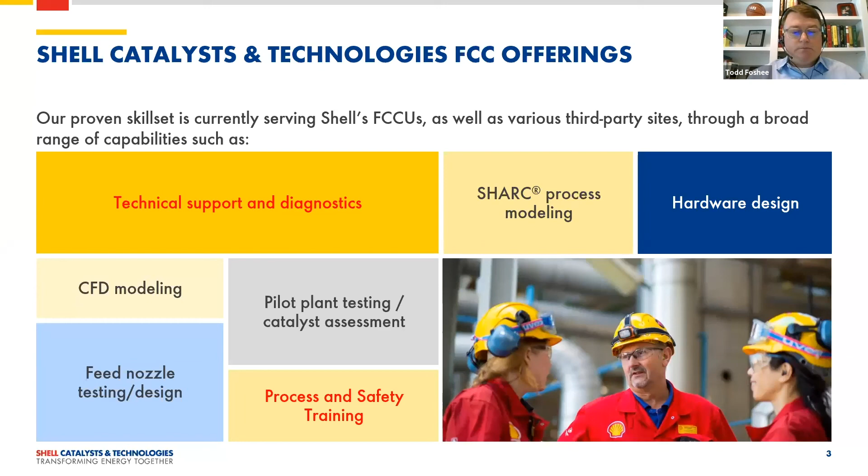So what is SHARC? Well, let's start with the acronym itself. SHARC stands for Shell Advanced and Rigorous Cat Cracking Model. Okay, so it's a model developed by Shell based on decades of R&D research and includes over 50,000 different test runs from pilot plants and FCC unit operations. And all of that was done to generate a set of proprietary kinetic correlations as well as feed characterization correlations.

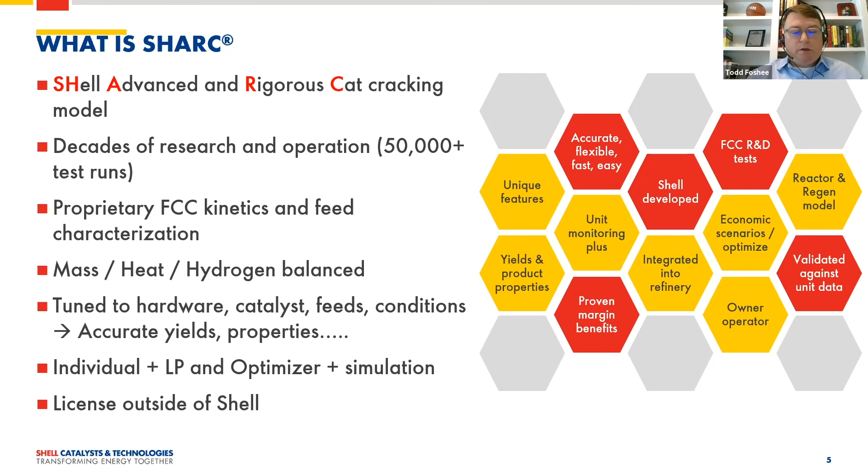Beyond doing unit monitoring, SHARC can be utilized to generate base plus delta vectors to be used in the LP model by the economics and scheduling team. And it also can be used to run the online optimizer for the FCC. Of course, I've already mentioned, this is used within Shell, but it's also available for license outside of Shell.

The history of SHARC. So it dates back all the way to the beginnings of FCC in the 1940s and 50s, when Shell started to initially look into FCC kinetics and began an R&D program. In the 1960s, Shell was able to develop the first FCC kinetic model. It's the precursor to SHARC. It was based mainly on gas oil feeds and silica alumina catalyst. It was very accurate, but it was very slow and cumbersome due to the complexity of the model.

In the 1970s, Shell was able to expand the FCC kinetic model to cover resid feeds. It also was able to generate better kinetics through kinetic selectivities or selectivity ratios. And then it also implemented a feed characterization property, which was able to greatly simplify the ability to characterize the feed. It also produced a faster and easier to run model.

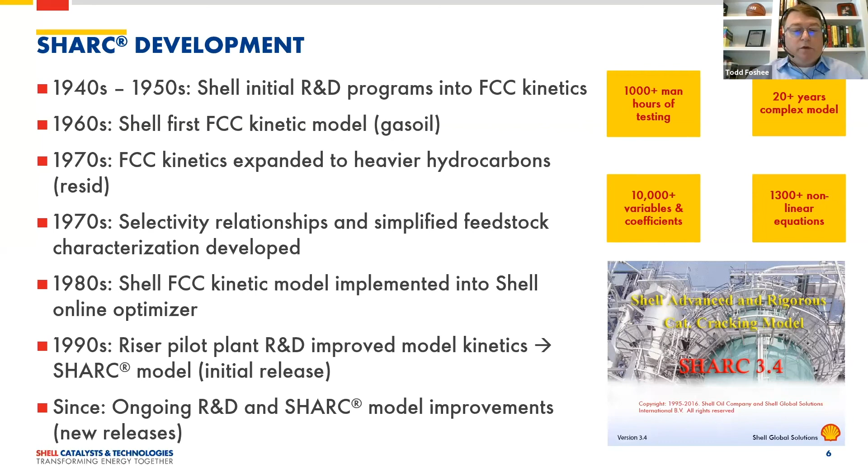In the 1980s, the model was further improved and made faster, such that it was first implemented within the first Shell Online Optimizer. In the 1990s, another R&D program was developed to get even more data for improved kinetics. And this was really the first release of SHARC. And so ever since that first release, Shell has been updating and improving SHARC and continues to do so today. In fact, the next release of SHARC, which is version 3.5, will be available sometime in 2021.

So how does SHARC work? Well, SHARC is made up of a bunch of different submodels, correlations, and equations that take the inputs from the user. These inputs are around the individual feeds that you want to use, the recycles, any catalyst and additive data that you have if it's different from the base case, any different kind of operating conditions that you want to input into the model.

And then it also encompasses any unit constraints that the model has. So this would be around capacities, limitations on such things as the wet gas compressor or the main air blower, or maybe catalyst circulation rates. So all of these inputs are put into the model, and then the different submodels, if you will, generate the outputs, which are basically the yields, the product properties, and the resultant operations.

So the different submodels include the kinetics or the yield model, of course. This basically generates the yields and the different selectivities. There's also a stripper model, which models the efficiency of the stripper, the hydrogen in coke. There's a heat and carbon balance model that determines the cat circulation rate as well as the resultant operating conditions for both the reactor and regenerator, like the regenerator temperature itself.

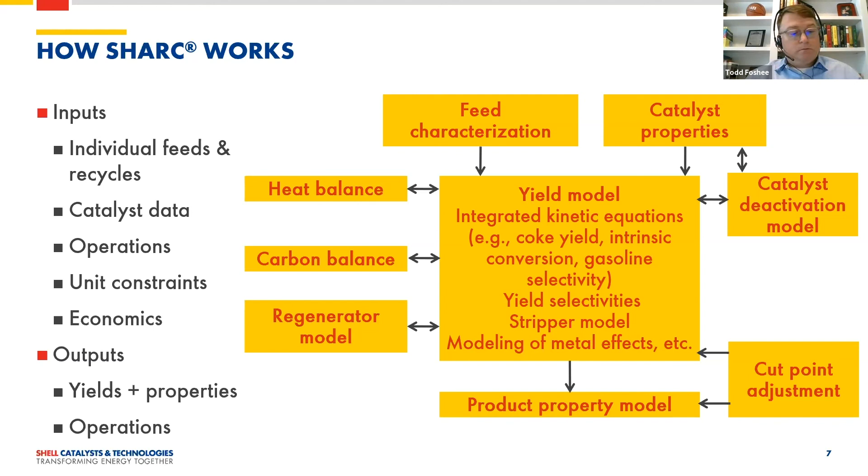So the logistics of the model, how does it work? Well, there's an interface where the inputs are put in and outputs are received. There's three different types of interfaces that we have for SHARC. There's your typical normal GUI interface, which is more tabular in nature, and I'll show a picture of this interface later on. It's good for entering information on the different components and executing the model and seeing how it affects the model.

But then there's also a flow sheet simulator, which is more along the lines of what a DCS screen or a Pro2 simulation would look like. This has the capability of changing some inputs, executing the model, and seeing the impacts over the full range of the model, not just the screen that you would be looking at on the normal interface. The final interface is an Excel-based interface, and this basically uses the data pump feature that I was discussing before. You can run the full version of SHARC within the Excel model.

So as I mentioned, you have inputs. Those inputs go into the SHARC model, and the SHARC model, as I've described before, is a bunch of different submodels, which have a bunch of correlations and equations in those. Those equations are sent to an equation solver that solves these equations simultaneously. And then it spits back out results and sends it back to whatever interface that you happen to be using. This describes how the standalone model works.

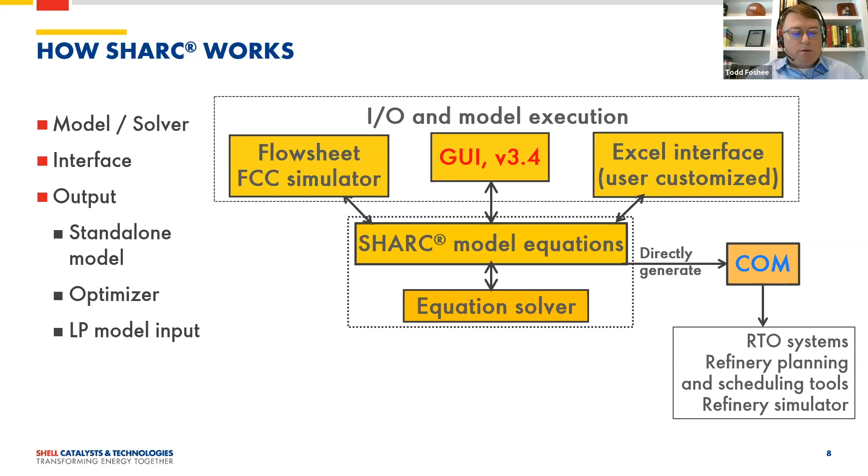So what are some of the uses for SHARC? SHARC has many different uses, going from day-to-day unit monitoring type uses all the way through specific opportunity evaluations. Looking at the unit monitoring side of things, SHARC is used to evaluate the performance of the unit against the base case in order to help the unit engineer do early detection on any issues that there might be on hardware or catalyst. These kinds of issues on hardware or catalyst are hard to detect by just looking at trend lines, such as you might be able to do with fluidization issues or with slide valve DP issues. And the reason for this is the fact that the feed properties and operating conditions are constantly changing. So you really need a base case that is able to predict these changing conditions and compare how your specific test run is performing against that base case.

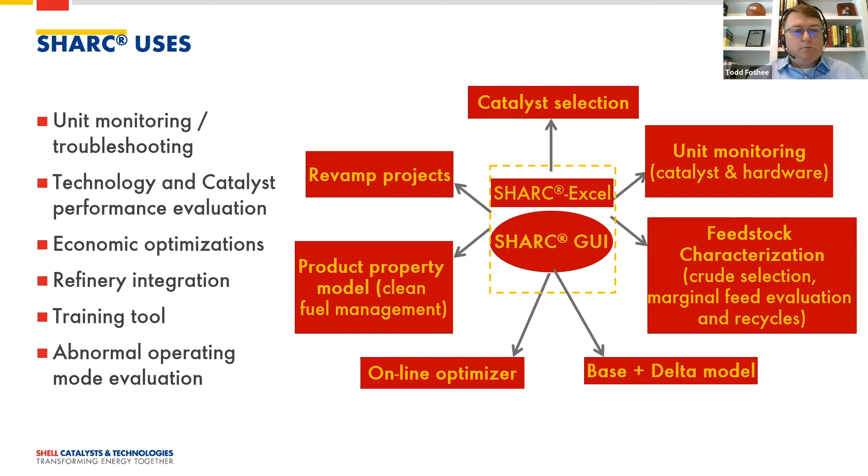So as far as unit monitoring or troubleshooting is concerned, unit monitoring is one of the key activities for the unit engineer. As I mentioned, it's used for early detection of any issues so that corrective action can be done as promptly as possible, helping the FCC unit and the refinery in general save money and retain margin. This starts with getting test runs on a weekly or bi-weekly basis and comparing these test run inputs against the SHARC base case.

So I've already mentioned that you really need a SHARC model or FCC kinetic model comparison of test run information against a base case to really predict if there's an issue on hardware or catalyst or not. It's not as simple as just looking at trends. I mentioned that was because of the constantly changing feed properties and operating conditions. So having a good kinetic model or base case is essential for this activity.

When the unit engineer does his weekly or bi-weekly test run and compares it against the base case, if there's complete alignment or the results match fairly well, then everything's running as it should. Once there starts to be a deviation or a gap between the test run information and the base case information, then the unit engineer knows that something's not quite right and they need to do some further investigation. So at that point, he really doesn't know what's going on. He just knows that something's going on.

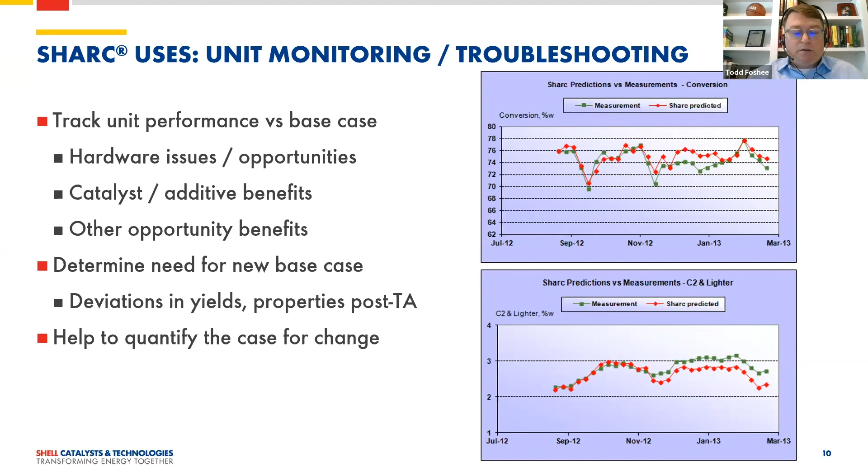And then, of course, using SHARC, you can tell whether a new base case is needed or not. So beyond just having a gap, like you might see with a potential hardware or catalyst issue, when you have a base case that needs to be updated, you have different responses between the way the base case responds and the way the test run information responds.

Another use for SHARC is for evaluating purchase feed opportunities. So SHARC has quite a bit of flexibility built into it. It has the ability to analyze up to 6 different feeds, ranging anywhere from VGO to resid to DAO, and they can be hydrotreated or unhydrotreated feeds. It also can evaluate up to 3 different recycle streams: LCO, HCO, and slurry oil. So with this functionality and flexibility, you can have your existing feeds defined, and you can then define a new feed in one of the unused feed slots, if you will.

Using this, you can evaluate the economics and the effect on the unit based on yields and operating conditions, as well as the catalyst effects. I've already talked about the catalyst deactivation model within the model. You can utilize that to more accurately predict how these feed opportunities will affect the ECAT.

So there's two different modes of operation within SHARC. There's a simulation mode and there's an optimization mode. So within the simulation mode, if you know exactly what kind of feed you want to run, what the rate is, and what the operating conditions are that you want to run, you can run that and see what the impact is on the yields and the resultant operating conditions. Within the simulation mode, it will use the unit constraints to determine whether the operation that you've chosen falls within constraints, or if it falls outside of the constraints, it'll give you an error message to tell you what constraint you violated.

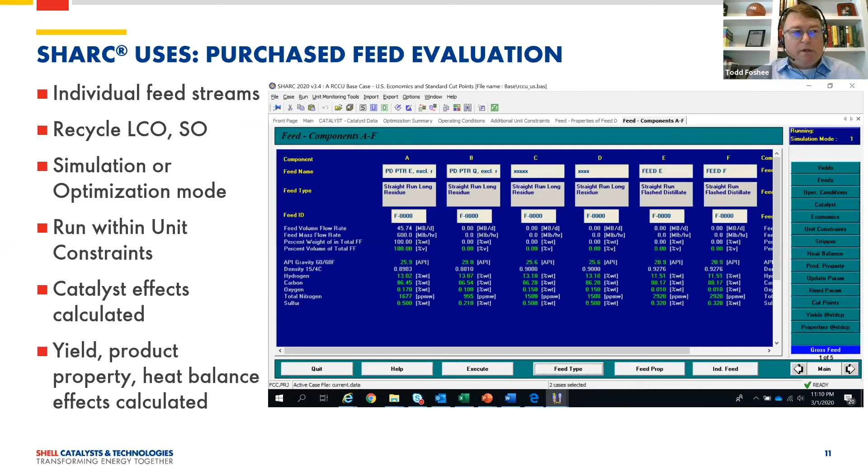Within the optimization mode, you have several different choices. You can choose to vary the feed or not vary the feed. You can look at the feed and see what the outcome is, do an economic evaluation based on the outputs, and determine whether that feed is something you want to pursue.

Another evaluation you can do is on different operating conditions, alternative operating conditions. There are some similarities to the opportunity feed evaluation. You have the same number of feeds to play with, so 6 different feeds ranging from VGO to resid to DAO, hydrotreated, unhydrotreated. You have the same recycles to play with, and the same different modes of operation.

You can do simulation mode again and see exactly the operation that you want to simulate, and directly get what the changes are to yields and resultant operating conditions. Or you can use the optimization mode to let the model vary the inputs and operate within the unit constraints to maximize the objective function that you've chosen.

I've already talked a couple of times about the catalyst deactivation model, but I'll make another plug here. If one of the operation modes you're considering changing is, say, regenerator mode, this catalyst deactivation model is very good at taking changes in regenerator temperature, changes in CRC, and accurately predicting the effect that it will have on the ECAT properties.

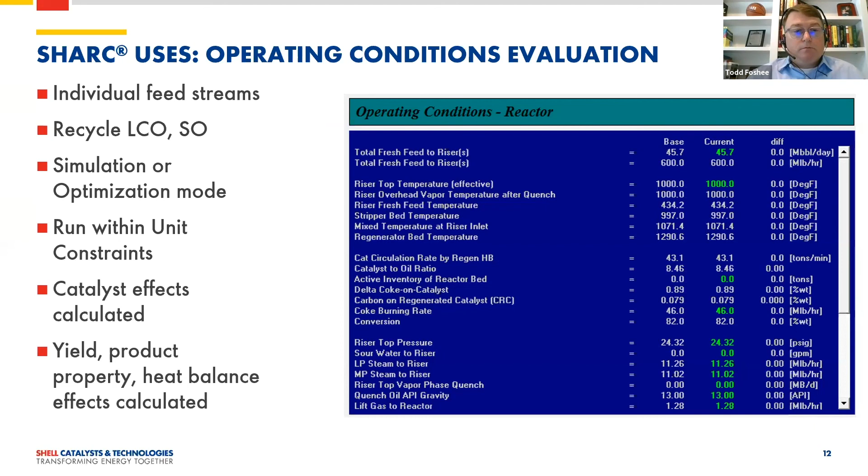So some of the SHARC features and benefits, some of which I've already mentioned a couple of different times. SHARC can be used for studies and, of course, unit monitoring. It can be fully integrated into other refinery tools. One thing I haven't mentioned yet is that SHARC is not just for Shell FCCs - SHARC can be tuned for any FCC.

It has many different useful and flexible features, such as choice of units of measure, choice of standard or user-defined cut points. I've already mentioned the many individual feed streams that you can set up. You have different recycles to choose from, and there's also a quench selection - you can put in post-riser quench if you want to.

SHARC has the ability to export files from one model and then take those exported files and re-import them into another model. This has to do with, say, different feeds, economics, test runs, and the like, and that basically helps so that you don't have to manually input the information every single time. You can export from one model and import into another.

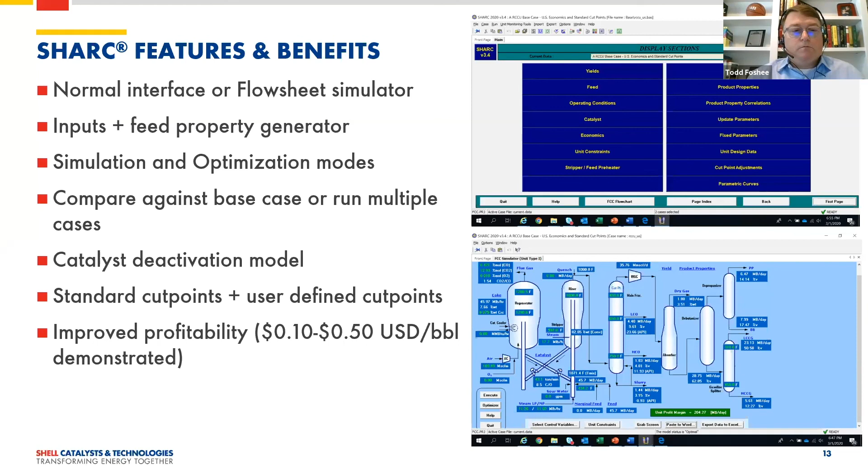So talk a little bit more in detail about the feed property generator. The feed property generator is extremely important to get good feed characterization. Basically, you're able to generate from a select amount of feed data that you have more feed information, more feed properties that allow you to fully characterize the feed, because the more information you have about the feed, the better and more accurate prediction you're going to have.

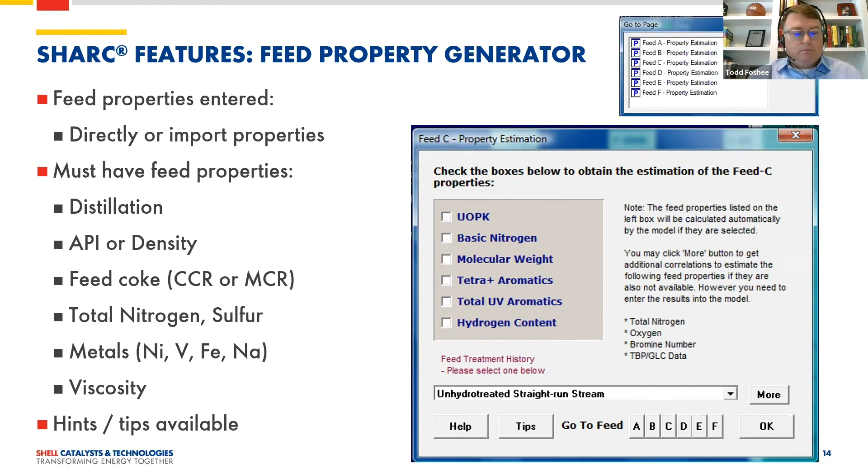So we've talked a little bit about the different modes of operation. I mentioned simulation mode and optimization mode. Simulation mode is to see the impacts of a specific set of changes you want to make within the model, whether those impacts are on feed or operating conditions or whatever, and see how those impact the yields and the resultant operating conditions.

You have up to 6 different feeds and 3 different recycles to apply these changes to. You have a bunch of different choices on how you want to reconcile the heat balance. For instance, you could choose to specify the coke make and the air rate, or if you weren't sure about one of those, you could choose to specify the preheat temperature, or the CO content or the O2 content, depending on what kind of regeneration mode you're in.

You could also look at constraints. It uses the constraints, but it doesn't force the solution to fall within the constraints, so it will give you a message if you do violate the constraints. If you do happen to try and solve or find a solution that's not solvable, it's an infeasible solution, the model will give you an error message on that too, but it'll return to the last feasible solution, so you're not stuck with an infeasible solution.

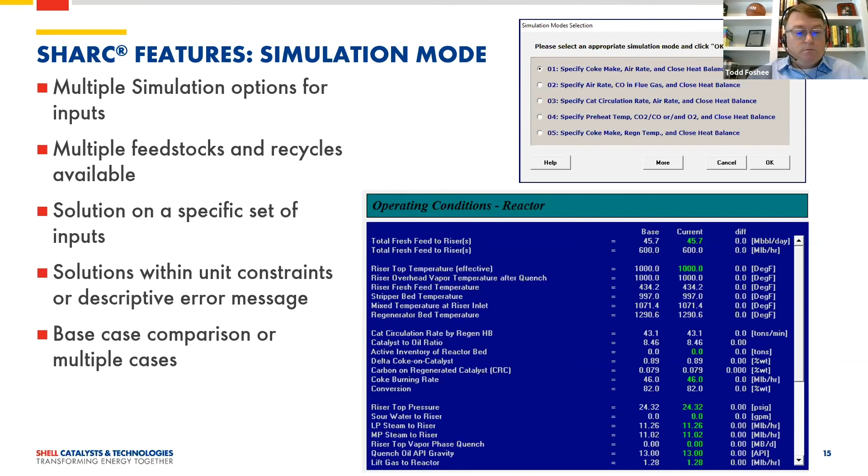Optimization mode, of course, has some similarities to simulation mode in the sense that you have the choice of all the different feedstocks that you can use, as well as the different recycles. But the essence of optimization mode is you want to choose an objective function, and there's different objective functions for which you can choose. There's 6 different ones you can choose from, ranging from maximizing profits to maximizing conversion, maximizing gasoline, maximizing LPG, maximizing LCO, and maximizing octane.

So you choose one of those objective functions. Then, unlike simulation mode, you can also choose to vary the different feeds if you want to, as well as other input conditions, to maximize the objective function.

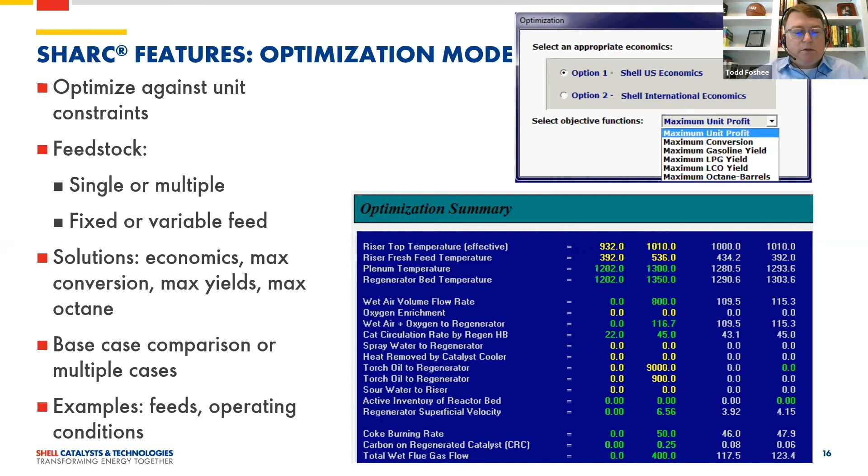So optimization mode has some key benefits to it for evaluation of different opportunities, whether that be an economic opportunity or a yield type of opportunity, to see how the unit operates within the constraints, but see how the yields fall out, as well as the resultant operating conditions.

Okay, just to summarize here, we talked about SHARC being what it is. It's Shell's proprietary FCC kinetic model. It can be used to tune any model to fit any FCC model, not just a Shell model. It's comprised of a bunch of different submodels and correlations and equations, such as a stripper, regenerator model, catalyst deactivation model, CO boiler model, just to name a few.

It's based on a lot of research that dates all the way back to the 1940s and the original kinetics R&D work that Shell did, but it's been progressed along the way. It's consistently updated through an ongoing R&D program that we have here at Shell, and this really helps to drive the accuracy and the confidence in the results that the SHARC model has.

SHARC as a base case can be used for setting up a base case, unit monitoring, and a lot of different things. But setting up the base case, getting the test runs done over a range of different operating conditions and feed rates and feed conditions, gives the base case model a robustness, flexibility, and accuracy level that really sets SHARC apart.

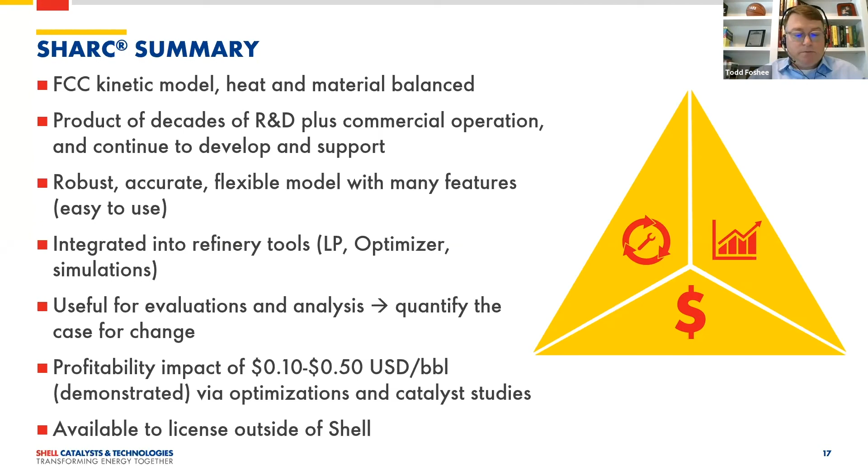Let me just share the Q&A screen. There are several questions for you. The first one is from Alan Kramer: can you please expand on the capabilities of SHARC to perform catalyst selection predictions? What inputs or data are required to do this? How accurate are the results?

We basically do this a lot within the Shell system. We'll take the different inputs we get from the catalyst vendors regarding the catalyst type and the different catalyst properties - the surface area, Z/M ratios, all those things. We'll put those into the system along with some feed. We'll get a feed sample from the site considering a catalyst evaluation, and then we'll evaluate the catalyst performance. We do that in our pilot plant, and then we test - we input those results into SHARC and we normalize them. Those results are compared and contrasted against the results that the catalyst vendor may produce, and it generally sparks conversations about whether there's different directions our predictions might be showing as far as yields or whatever, versus what the catalyst vendor may show.